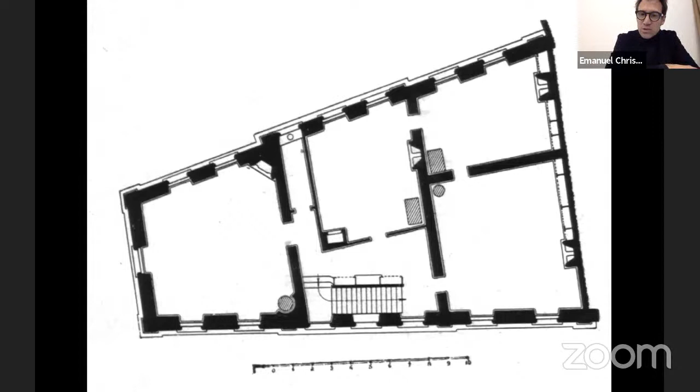That was the slide from the time, and I started to speak about the plan as the essential element, or tool, of the architect. I was speaking — I didn't listen to it again, so maybe it's wrong — about the beauty and the fascination of the plan. It was about the plan representing the essence of a project, of a building, its structure, its space, its tectonics — a fantastic condensation of information in one two-dimensional drawing, all the possible reasons why and how we can imagine and guess that we read in the plan.

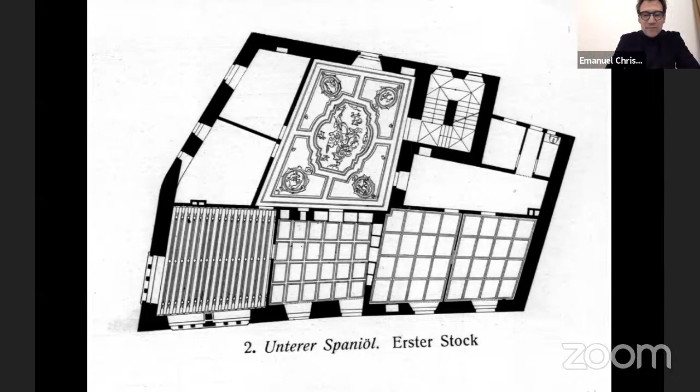There is the relationship of the building represented in the plan and to its neighbor. It's a relationship between a building and the city that we can read or start to understand through the logic of a plan, like in this example.

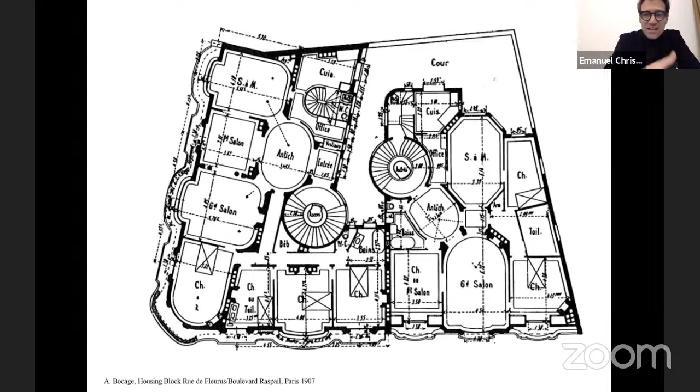So all these plans, I showed them 11 years ago, but since most of the audience is probably a bit fresher than us, I thought why not show the plans again. The plan speaks of how we live in a building. It somehow contains the script of a scenario. A plan is not only about how to build and put architectonical elements together, but it is a plan about how to move through a space and how to use it.

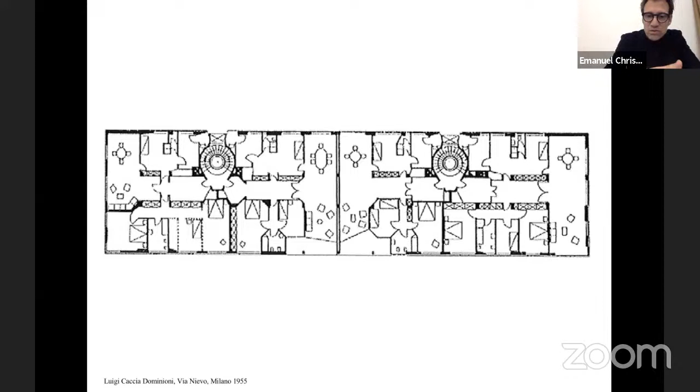There is another very condensed example that actually almost expresses a symbolic value as such. It's a sign. The plan is a sign. It is the ultimate architectonic or architectural representation. However, that was probably more or less what I tried to say as an introduction to a building that was a housing building, trying to vary the system of one type along its development.

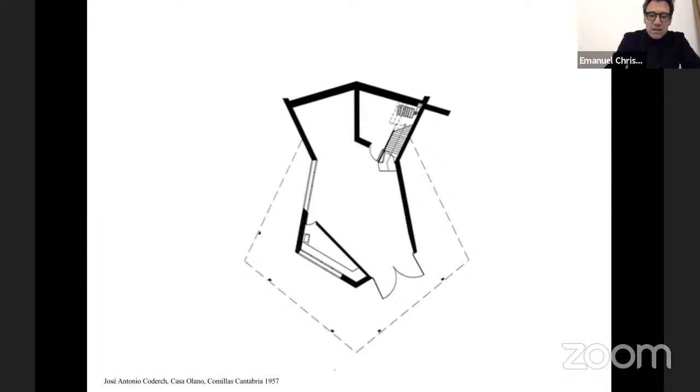But that has been published many times already. However, now it's a different date, a couple of years later. And I thought the title for this lecture could be 'More Plans.' Since I felt obliged to represent an idea of progress, I come with more plans.

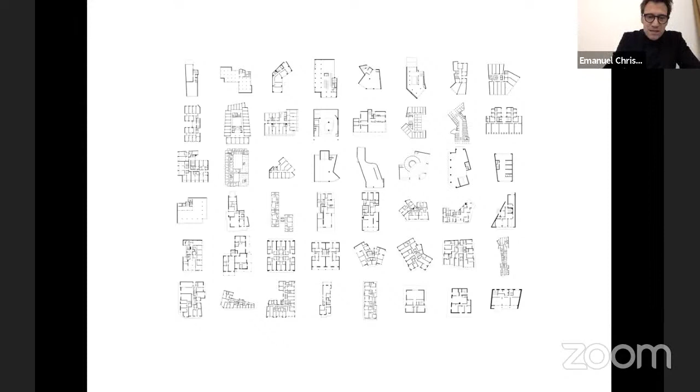Of course, all the architects, us included, traveled for the Parthenon at some point in their life and career. But actually what we found much more interesting is the sea of houses around the Parthenon that was the subject of our research, because we found there is a quality, and I'm even tempted to say a beauty, in this everyday architecture. It was around the moment, not so long after the financial crisis, that we went there, and still we could see and exchange with our generation of architects and students who were starting to get interested again in that structure that they had to use in a different way.

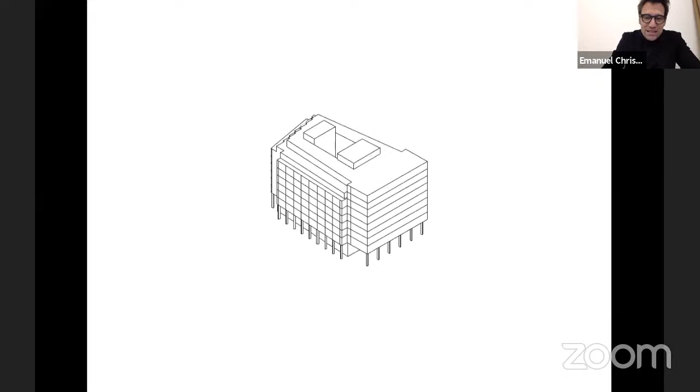Nevertheless, we took these drawings or plans and tried to understand them. So we went to find archival material to measure. I will not speak about every single building, but rather run through a few drawings, where we understand that the plan is only the base for a three-dimensional understanding.

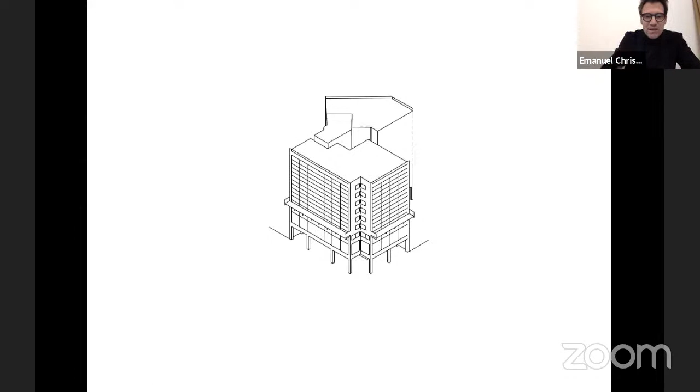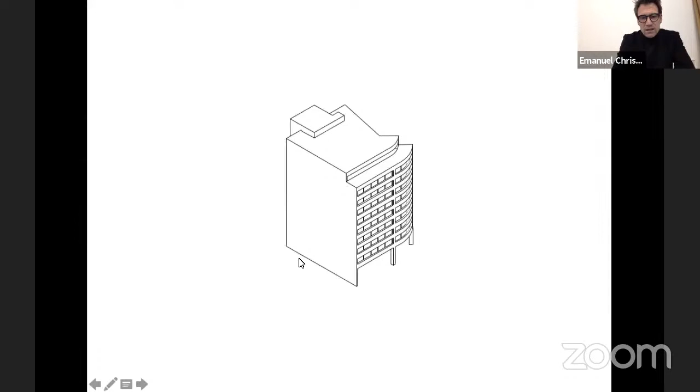So I was speaking about the party wall, the logic of the building, the plan that forms a corner to two sides, the plan of a building that stands completely free and fills a full block, different ways of using the corner, or a lot like this one.

This is a garage. There are many garages. That's the fascinating thing in Athens, that ultimately you have housing, office, garages, because that was to a good extent built in the 60s and the 70s. It's not informal settlement, and still there was not much planning.

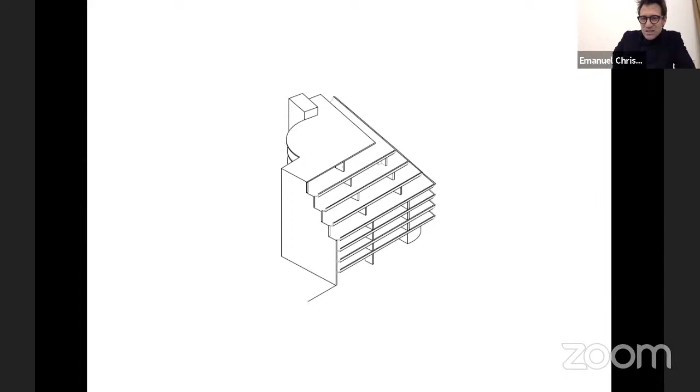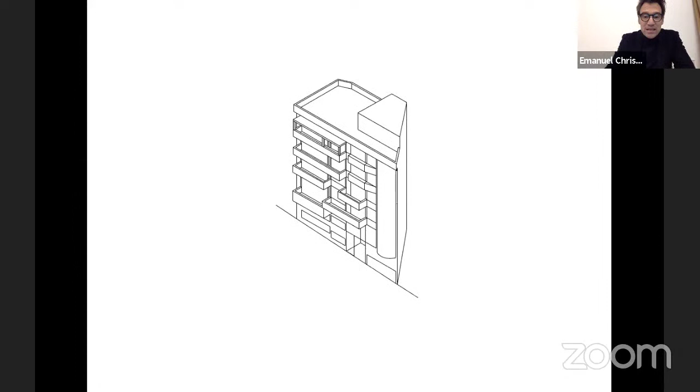The interesting thing is, one could argue, there is the whole variety of urban use in the same type of building. Of course, there are variations - sometimes balconies more articulated, sometimes less. But somehow the DNA, the inherent structure to the building, which is the building structure, is pretty much always the same, and this has to do with means of production, economy, and technology.

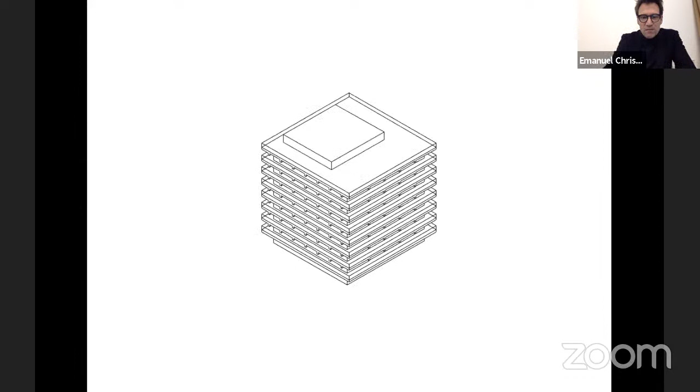You see, so it's more than 40, I guess. I'll go very quick - we can always come back if there's a question about one of these building types. You see, some of them are very regular, freestanding, almost like a temple, a modern temple of the everyday. Some are much more specific.

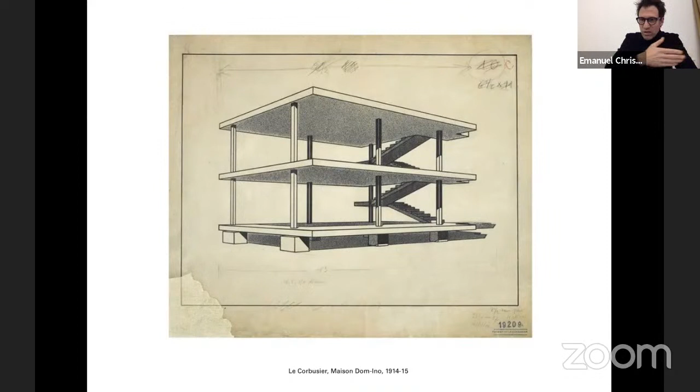And again, the underlying principle in a way goes back to this - I think it was our friend and colleague Pier Aureli who described the urbanism of Athens in a book where he referred also to the Dom-Ino System by Le Corbusier. In a way, that's what's beautiful about Athens - it's a sort of modernist, even later modernist, or Mediterranean modern version of Parisian urbanism, where just one type of house is set one next to the other.

However, we put that together, and I'm sharing this with you just to give an indication of how we started to build up a way of looking at the world of architecture, how we tried to establish a structure in documenting, in reading, documenting, and ultimately using this information, because we believe that making architecture has a lot to do with looking at buildings, studying examples.

It's a very humble and modest and absolutely not new approach, I think, but strangely enough, by studying, by researching and investigating, by finding ways to represent what we observe, we engage with a new design every time we do that. In that sense, I consider - at least that's my position, to be discussed afterwards in the debate - this a very contemporary way of bringing forward our discipline, our profession, and ultimately our environment.

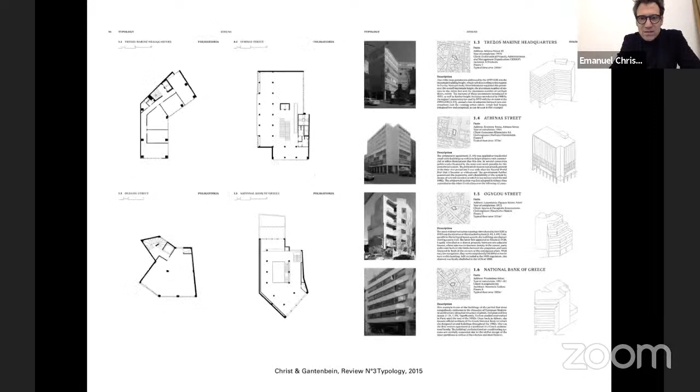So here you see just a few pages spread from that research, the chapter of Athens, then also Sao Paulo, as you could see, was there - that was a mistake. However, look, this is on the left-hand side. You see, for example, bottom left, and we saw it - I mean, this is a strange plan.

Look how beautiful this plan is. I'm speaking about the one bottom left. There is this opening, kind of fan-like plan, the floor plate opening obviously on a soft corner with one column in the center, a little staircase and a lift, and that's it. I mean, this is very pragmatic, very intelligent, very economical, and at the same time so beautiful.

It is so hierarchical - that's why I find it beautiful. It is celebrating the presence of one column in one space. It is celebrating that there is a street front and the back. It's celebrating that there is tension in the geometry of two non-parallel walls. It is celebrating, at least in my reading, the presence of an asymmetric movement through the floor, where you reach the staircase and spiral down or up. And yes, there is a little cupboard, a piece of infrastructure in the other corner where you would have the toilets. I mean, this is sort of the most perfect minimal house I could think of.

I mean, I'm making a bit the case - it is sort of trying to engage with you guys, reading these drawings.

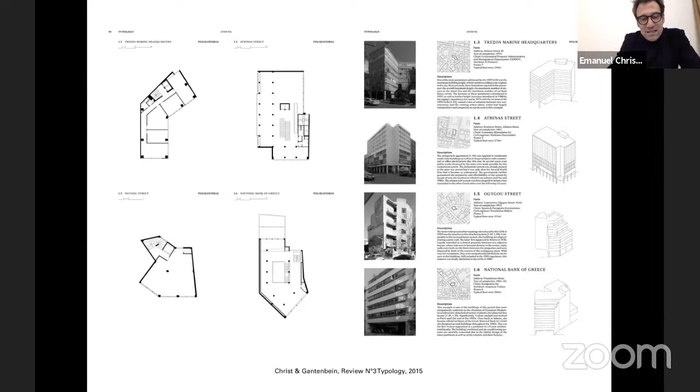So again, here we have these plans that I brought for today's lecture. I could go on forever on many of those. These things have been published. Here, look, that's the garage. Do you see the top right one here? Two car lifts, again, one column.

I mean, that's minimal conceptual art almost. Or the other one down here, there is a ramp. That's a ramp. Do you see my arrow? Yeah, and then you gain the floor.

And it's not, there is so little space, but apparently at some point in history it was worth it. It was, economically speaking, viable to build such a small plot, to offer a few parking lots per floor, and it was an economy.

Maybe after, and that's one of the essential statements of that lecture, after a certain time it might be that the cars are not needed anymore, or maybe there are better systems to deal with them, or they disappear completely, who knows. But the form that is created through that logic at that moment in time is something that will stay, ideally. So I believe the plan, the concept of a spatial configuration, ideally, is something that can last.

And therefore, my celebration, so to speak, of the drawing is in fact an attempt to read more in the logic of the plan than just its functional condition. By doing so, I hope to isolate a quality that I can carry, that we can project into the future.

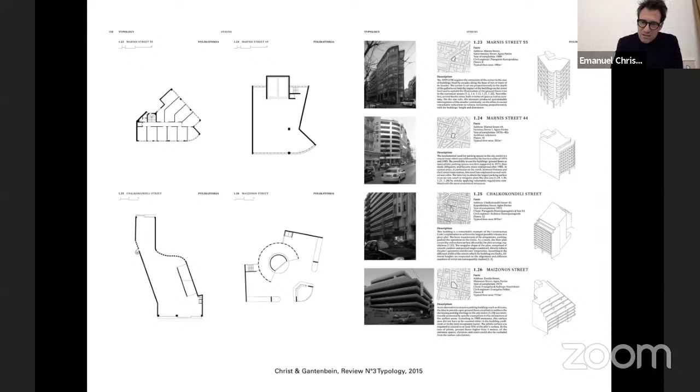And that brings us closer to the concept of type that stands for a principle, for a sort of an engram, for something that is maybe the idea of a building more than the actual building. So studying plans ultimately means deciphering typological patterns, and that's what I think is interesting and also for the teaching, maybe something to be debated later.

Okay, I should regain speed and just browse through these pages of this chapter on the Athens typology, as we called it.

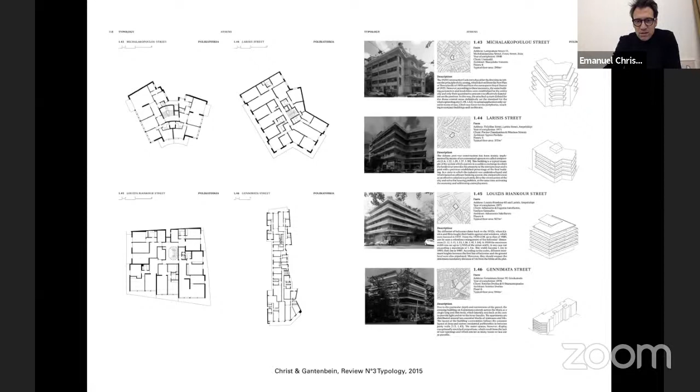As I said, this chapter is one out of four that were published already five to six years ago in this book called Typology: Athens, Paris, Delhi, and Sao Paulo. So it is a survey on these four metropolises. And actually, this was not the first we did.

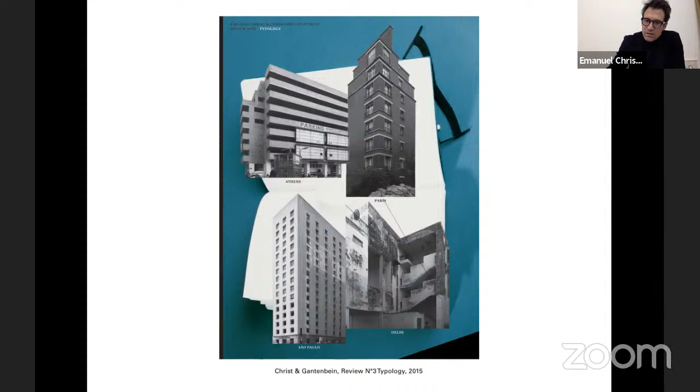So there is even more plans in the first book. That was, as you might guess, here it's written on the side, Typology: Hong Kong, Rome, New York, and Buenos Aires. So in total, we did that on eight or actually almost nine cities.

As I said in the beginning, mainly focused on the urban mass production of global cities, growing global cities, somehow culturally rooted in the European idea of a city, but like Hong Kong or also Buenos Aires, of course under specific circumstances, developing their own, or Sao Paulo, their own independent way of building an urban habitat. And that's very interesting also in comparison.

However, why are we doing that? Why, and we are still collecting plans and making plans, why would we do that? When we published this book, that was maybe two years before, but all that happened since I gave my lecture at the Berlage.

So to me, at least, I think it was a very seminal lecture, and I believe that's the esoteric part of today's presentation. Maybe my lecture on plans in Rotterdam at the time was the sort of an impulse to what then happened. And this is just to give you the title of what we then stated in a very manifesto way: Typology Transfer, Towards an Urban Architecture, we call that.

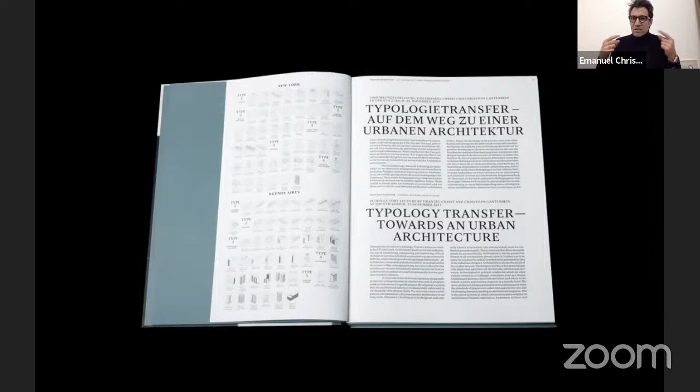Nevertheless, what we then did is we created this collage that was actually an enormous panoramic image, or picture—actually we called it a motion picture because it was a moving picture on a screen. A collage where we took not the plans, but the buildings that we found in these different cities, and we just implanted them into the longest, most normal, perhaps also most boring street in Zurich. The tramway in blue is typical Zurich. The brown house, the beige house on the corner, this is Zurich. It's not bad, it's very good even.

But so what happens? It was more, of course, a provocation towards ourselves. What happens if we start to imagine not only a city or part of a city growing? So it's not only about densification in terms of quantities, it is also about complexification through different types.

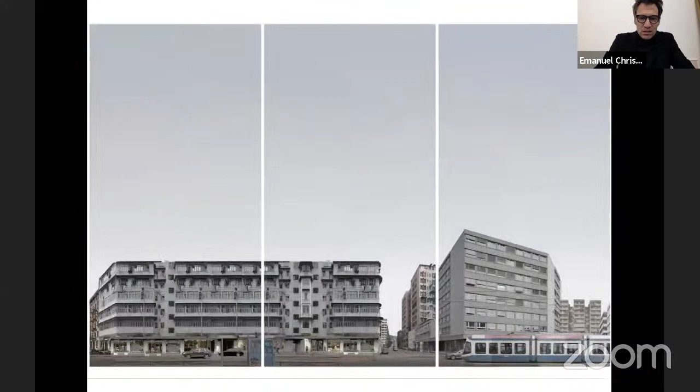However, that was then this image that we liked a lot. And this is, of course, the funny thing, maybe why it came to my mind—it's not that I show that every lecture, so forgive me if I got a bit too nostalgic about our research, but I find it interesting because ultimately we projected this motion, this moving picture, on a 9-meter wide screen.

At the Rotterdam Biennale 2012—already feels like Stone Age—but it was, I think, called How We Make the City, or How to Make a City. And we called our projection Remaking Zurich. So that's what you see here, that we did with our ETH team.

So it is about urban architecture, understanding that the urban artifact, the buildings that we can see, that we can describe, that we can fall in love with, are somehow the key to something lying behind. The urban type is maybe the methodological or theoretical means—a very established convention in architectural theory, but that's why I find it interesting to revisit from time to time. It goes back to 18th century France, but I won't make that detour now, we could do it on another occasion. However, this is something we felt was very inspiring, and that takes us further.

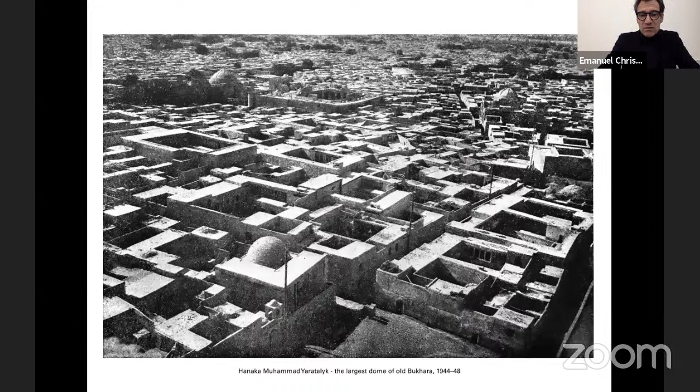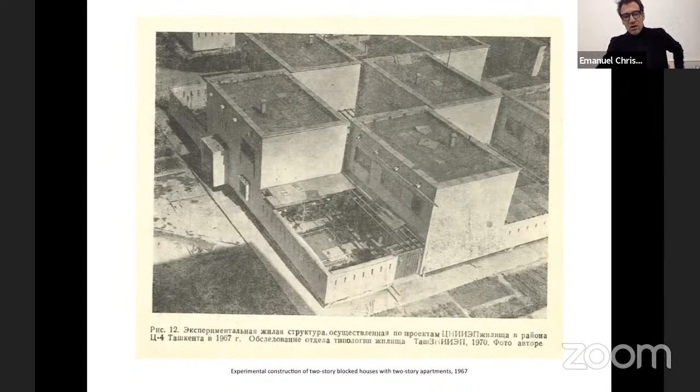There are different versions. There's the tradition of the courtyard house, of course, but also, as I said, we could see this rationally planned version of it. So that's interesting: the traditional example becomes a type, gets reinterpreted, and is pushed forward through modern means of mass production, and so on.

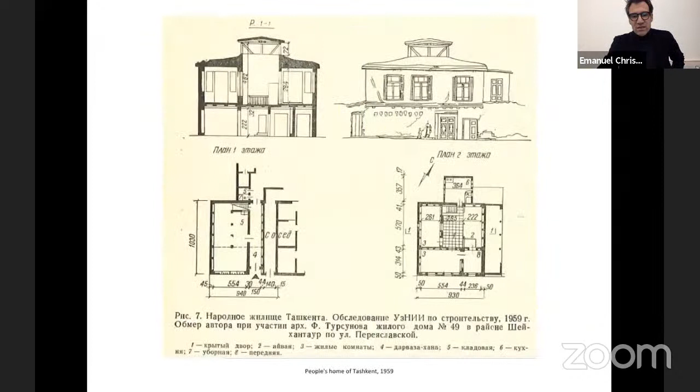There are some drawings that we found. The research was in a way very exciting, but also quite demanding, because we do not speak Uzbek or Russian in our team. So establishing the contacts, but these are things you know.

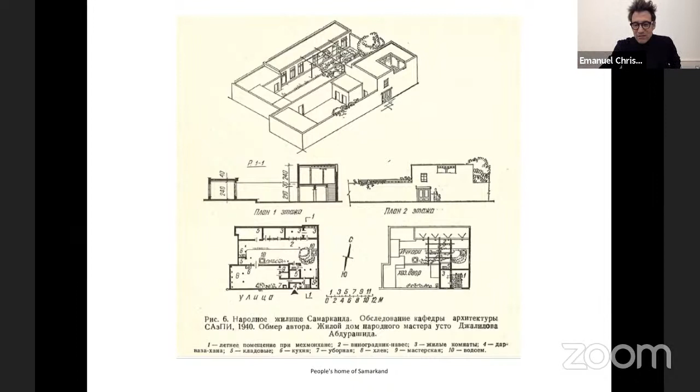Moving forward also means that we communicate and investigate, and that's something I don't have to talk about under the current circumstances - it's even a bit harder.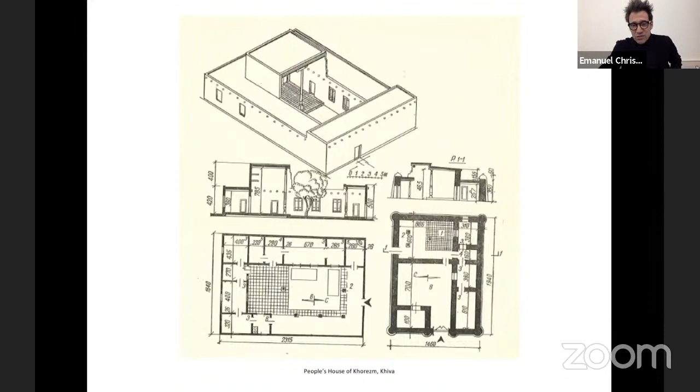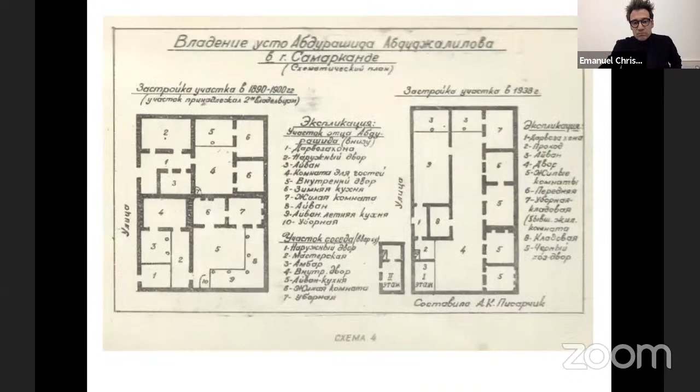Here you see our typological interests, the ways of representation that I was introducing in Athens. In a way they already existed here, because of course under the Soviet times there was a tradition of cultivating and studying these sources. Here you see the map again, speaking of that collision of two systems that I mentioned before.

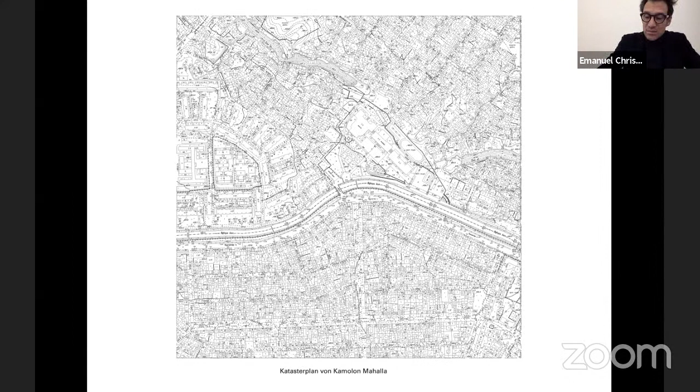Nowadays, and that's where our work is based, we have these official plans that only show the lots. That's what we have. From that, we try to understand and analyze and read that texture, to extract the logic of a building, and finally understand its plans, its types. And that's what we're doing.

With drones we could fly over these stretches of the city. It gives you an impression of this very homogeneous texture, even though if you look more closely we would find many differences. You see the courtyards, you see the overall height. Mostly the roofs are covered with corrugated steel.

There are many of these beautiful drone images, and it's quite a discovery, but there is no contemporary material on it at all. As I said, the quality of life is considered very high.

We could go there and visit. Here you see, I think from above, Stefano Zeni, who is in our team, with a colleague from another chair at ETH. What they are doing is installing their scanner, a 3D scanner that stands in the center of the courtyard and collects an endless number of digital data, so-called point clouds.

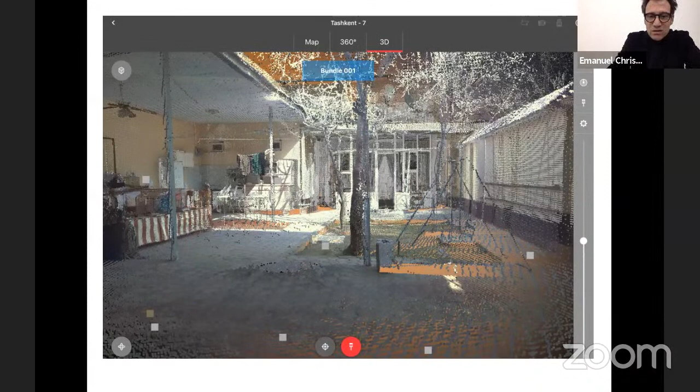As you know, this technology is not rocket science anymore. It's a very practical and beautiful tool to document and photograph, in a way digitally, a 360-degree environment, and that is the sort of roughly filtered outcome of these scans.

The only thing that cannot be registered, as you probably know, is the sky. Therefore the sky is somehow endlessly open. In this digital representation it looks a bit like a post-nuclear event sky, but that's not how it is in reality. That's what we find there.

Without going too much into detail, we can start to think about the relationship not only from one building to the street and to the neighbors, but also the relationship between the living space and the gardens and spaces of production, because there is partly production, but there is also - that's our scanner on the left-hand side, I think, on the tripod.

Here it stands also in the rooms. So we could really go and discover and save this precious information, because most of these buildings haven't been documented, and partly they're also transformed or replaced. We consider that very interesting research. We have all the data, and out of this data - this is now an ongoing process, work in progress.

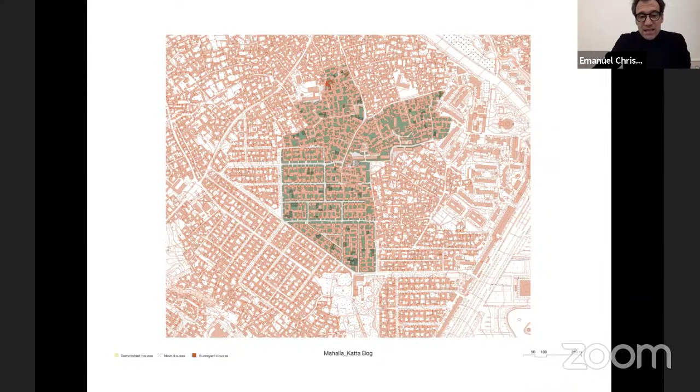We are producing our documents, and here you see I think these are the 10 mahalas that we were looking at in Tashkent. Now you see this starts to become a pattern that we are reading and trying to understand. A bit similar to Athens, there are more organized or less organized ways of putting these houses together, depending on the topography and when it was built.

You see that there is a high percentage of green, so the greenery is a very integrated part in that type. And I find that interesting because we are discussing this more and more. This is the case in Switzerland, I think it's the case in Holland, it's in Europe all over.

Together with that densification that I was celebrating before, there are questions raised about climate, about how to compensate what densification and urbanization is doing to our micro environment. And we are, all of us, architects in general, trying to find ways to integrate green into their designs.

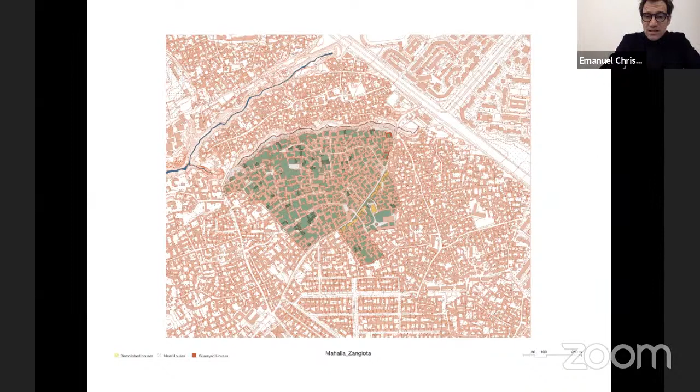That's actually a very old-fashioned way of doing it. It's high density, low rise, and high density is pretty dense, and it has a strong integration of green that is related to an idea of use. It's not decoration, it's not just a pro forma CO2 absorber. As I said, some of it is getting destroyed or replaced.

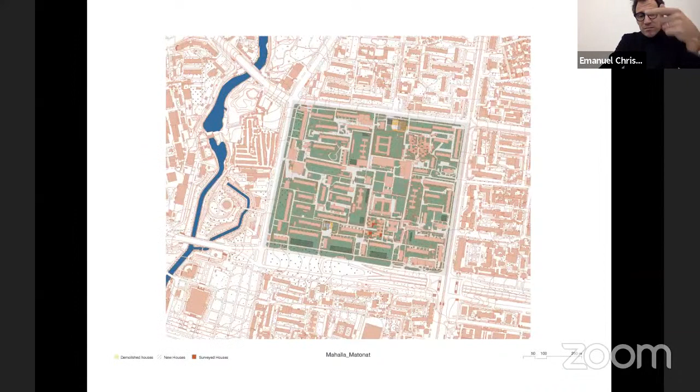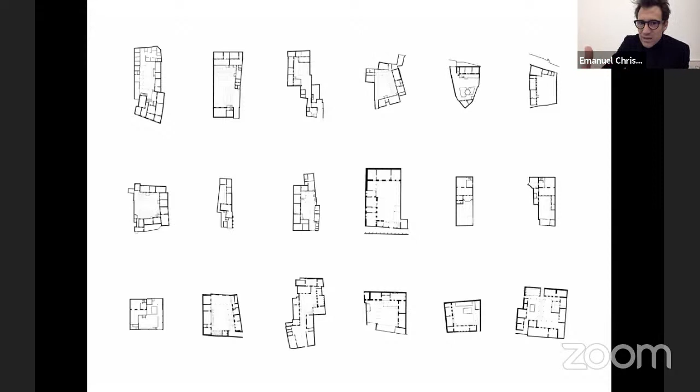That's then a mahala with a different typological pattern and so on. I don't want to lose myself too much in details, but since I promised more plans, here you see another series now of these types that we found in these mahalas. And coming back to my introductory words on what is hidden or kept, condensated and contained in a plan, it is always about this, what you see on the right-hand side.

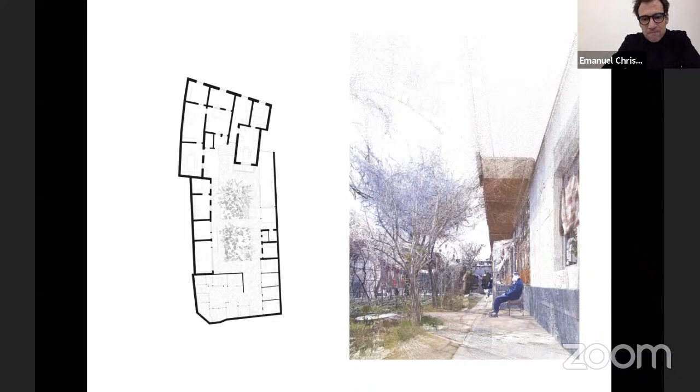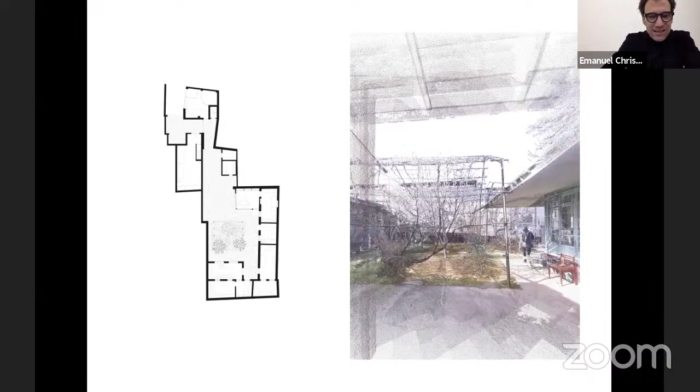And I like this juxtaposition because the plan on the left is the plan, it has a degree of abstraction, and the right-hand side is still a pretty rough image, maybe something between a drawing, a sketch, and of course a very precise digital photograph that gives us an understanding of what this courtyard is, how interior and exterior spaces are related, the small stretch of a garden where you would plant also your trees, bushes, and also fruit and vegetable. Many families have also small animals, typically quails and other birds that make a very strong sound in these micro environments.

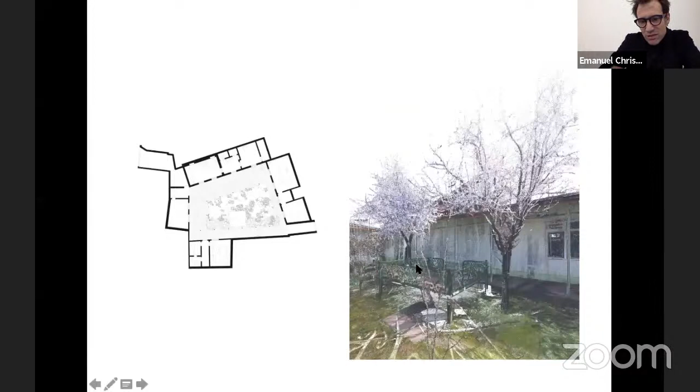This is something like a tapchan, like a bed or a sofa where you would also sit in the shade during the day. It can be very hot in the summer.

So of course, if I was a bit more precise, I would start now to speak about the climatic condition and also the fact that these small plots are then getting subdivided sometimes. And if a daughter or a son gets married, you add another element. So it is, as I said, not an at-once-planned perfect house, it rather grew over time. And in that sense, it is a bit different from other examples that I was mentioning earlier.

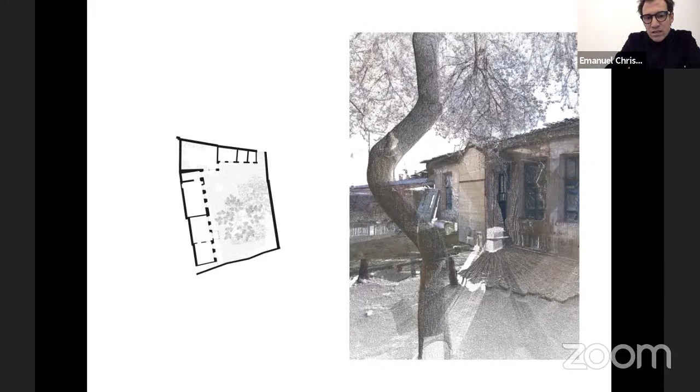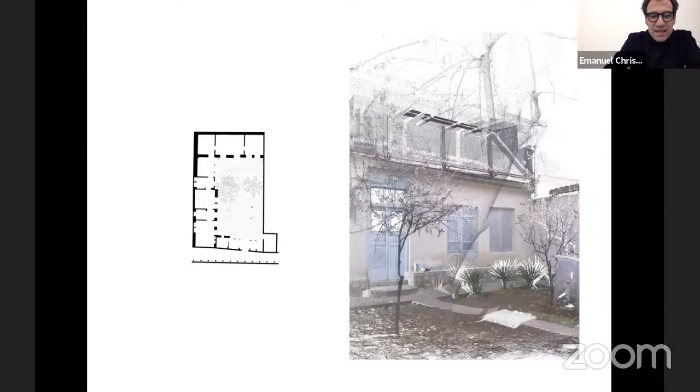And I think this is interesting now for us, that we can learn, absorb and adopt these patterns, these structures, these typological principles as well. In the end, it's mostly the courtyards that we're looking at, but in so many variations, in so many different scales and compositions - the courtyard in the front, the house in the back.

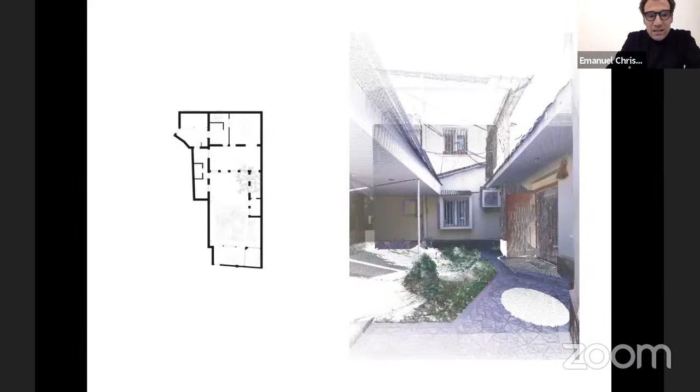As you can already see from the drawing, this is a regular type, so that's a planned one. That's a rational version, whereas the previous one was a grown-over-time version. The stretch, the plot, the lot is very regular, so that's a rational plan, a rational overall design. Whereas others that we saw before were more accidental in their form.

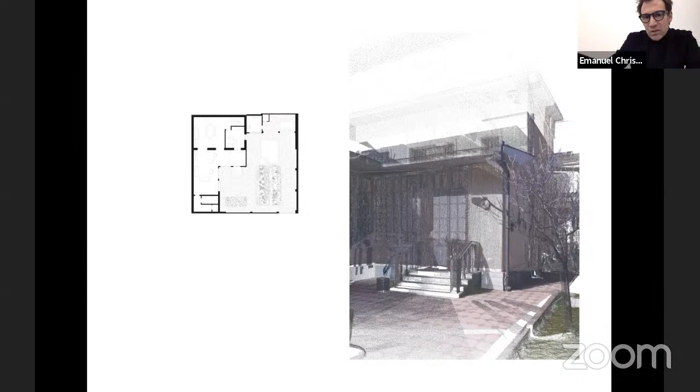So we start only by comparing. We can understand what is the pattern, what belongs to the principle, and what's the individual specific condition. And in very short, that's the logic of describing types: comparing, following a development over time. Only by doing so can we come to that essence of a building. Voila, I think that's more or less what we are.

There's much more information, I'm happy to share. You're the first ones to see that, I think. We shared it with our students at ETH, but not yet publicly.

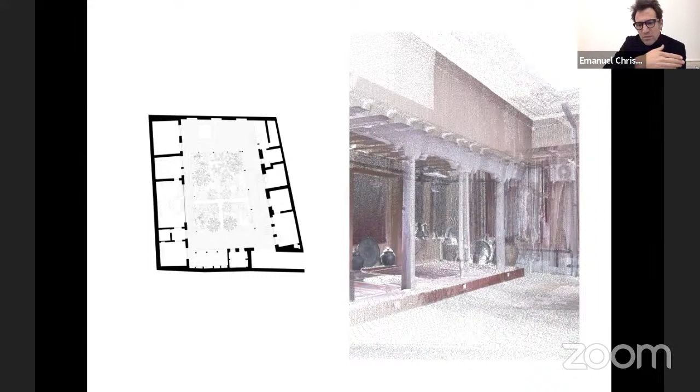We are working on a book currently where we have all these different media in a very beautiful systematic way. And we will also bring that to Venice this spring in May, where in another beautiful building by Sansovino in the Arsenale, just next to the Italian pavilion, we will do a representation. There our research project will be presented.

It will be debated and discussed, and showcased with an installation we are preparing. It is a scientific, artistic portrait that we are doing together with Bas Princen and with a photographer from the Netherlands, whom you for sure know.

And with whom we collaborate, which is a fantastic thing, and also Carlos Casas, a filmmaker and artist living in Paris, recording sound. So there is a very interesting multi-layered portrait of that phenomenon of the Mahalla that we would like to present if ever we can go to Venice.

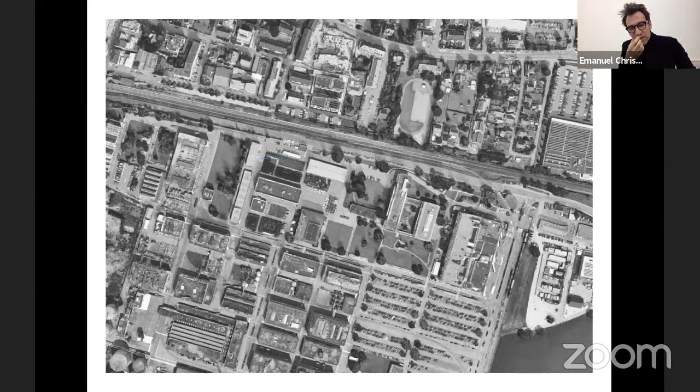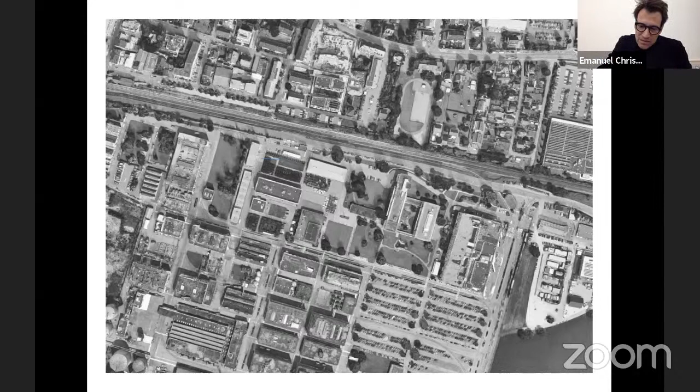Now it's the headquarters for the whole German part of that company. We were invited to make a competition project, more or less at the time when I was at the Berlage last time, so it goes back to around 2009, let's say. There we found this campus based on the idea of a classic modernist urban pattern. I'm tempted to call it the open field or even the open plan.

So it is not Athens, it's not Paris, neither is it the Mahalla in Uzbekistan. It's the more generic, European-American modern pattern of building a campus on an open field. You see a model, you see typical buildings as they were designed according to that idea throughout the 1940s, 50s, up to the 80s.

And then many things changed. The production plant got partly reduced, and the focus and emphasis shifted to administration, the headquarters, research and development, and communication, as it is for many industrial plants and sites in European cities.

This is a model that we built. It looks a bit older, and it looks a bit—I wouldn't say it's a shitty model, it's actually quite nice, but it's not very precise. You see, this is our representation, a model that is a few years old, and you see basically boxes.

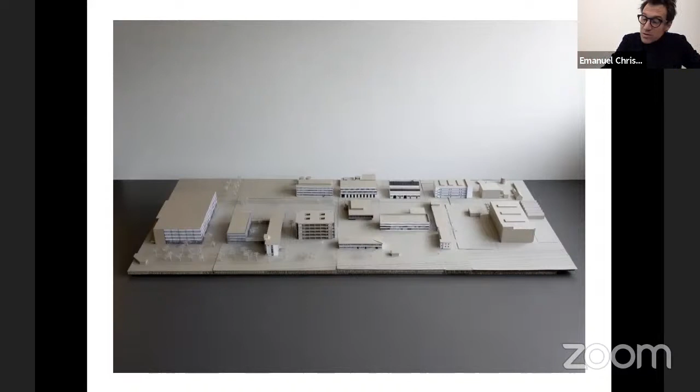The idea was to reframe this open plan of the campus, to create different interstitial spaces, a sort of plaza, and to relate with a minimal vocabulary our buildings to this urban condition of a public yet monofunctional environment, which is this campus. And that's a very interesting problem. That's why I chose this project for the discussion.

So it's not necessarily a fancy museum. It is more the everyday, it's the normal. And I thought it goes maybe well with the settlements in a Central Asian city like Tashkent, even though there is no courtyard, but there's maybe some other kind of ordinary things.

It goes certainly well with Athens and the Dom-ino System. So somehow to try to find the specific quality in the modern project, its types and its plans. That's maybe the topic of that second part, that's why I called it open plans. Since I guess we all know, in a nutshell, modernism is about the plan libre. And this idea of freedom and liberty then also comes with free movement by cars and all the disastrous things that followed. But I would make the case that the free plan, in this case the box, is still a very, very beautiful ambition in architecture.

That's then the building we finished, I think, in 2011 or so. So it's almost 10 years, perhaps. Yeah, nearly 10 years. It's our monumental reaction to the most banal principle of modernism, the column and the slab. And as you can see, here now maybe it gets physical again, because ultimately it's not about the plan, it's about the building, if I may say. I am a scholar of plans, perhaps, but I'm also a builder. We believe in buildings, and we are very privileged and happy and proud that we can contribute buildings to our environment.

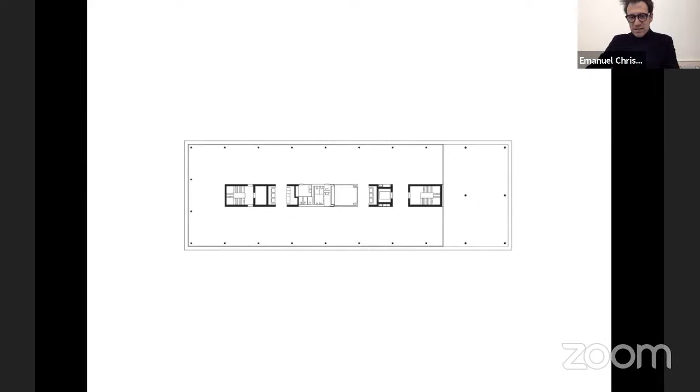There is one thing though, and you see it on the right-hand side, there the rhythm of the column changes. We see the line where the facade stops and the naked slab continues. So this is not a big thing, and it's not the courtyard of Tashkent, but it is the version of an additional space in an open plan that we convinced the client to build, even though the client thought he might not need it. This is an open loggia, a little bit, and it's almost like a mathematical scheme. I don't know, you could measure it, 20% maybe of the floor plate that we would give to an external space that is an informal space within the formality of the design, a space that belongs partly to the public square, that intersects with an axis that is in the grid of the main axis, the sort of the cardo of the industrial layout of that site.

So this little loggia, this is the ambition, that's the promise, it can take on a multi-layered, more complex function, because it belongs to the city, if I speak it or describe it as such, as it belongs to the building and to the users inside. And indeed, at least now it's very, very cold, but for many, many moments throughout the year, it's used, and actually very intensively used by the people. That was, of course, as architects sometimes do, the photographs when the open plan is also an empty plan.

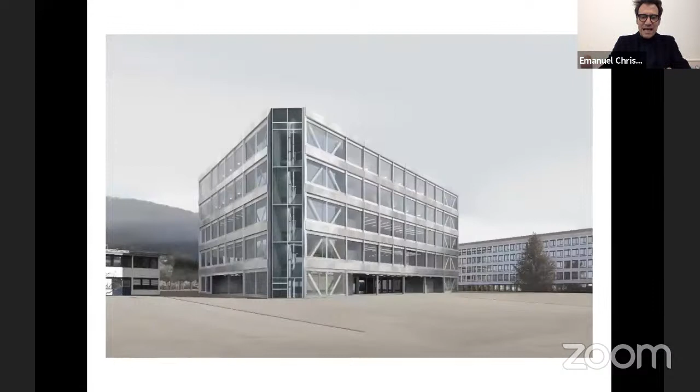The idea is to imagine this building as an industrial functional building. If you look at the proportions, you would start to see, this is a rendering, but still compared to the neighboring building it is quite generous in dimensions and proportions. So I'm tempted to say the design metaphors that we sometimes use are still in vigor. I'm speaking of a sort of an industrial palazzo, something that has a dignity and even a representation, an idea of representation with its facades.

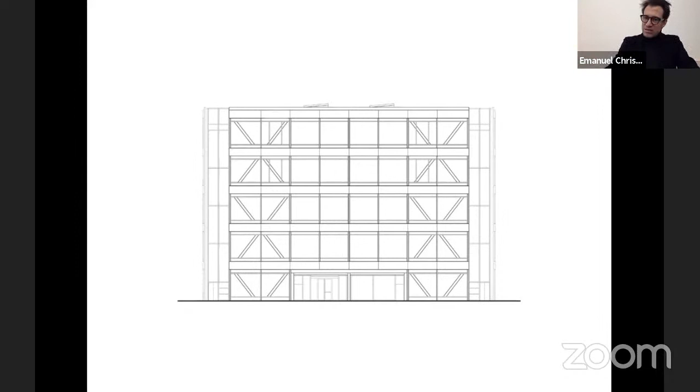In a more abstract representation, we would see it in an elevation drawing, a ground floor with 4 floors above, the short facade on the side to that plaza, facing the first building we were just looking at. So the horizontal bands, almost a bit of a signature element of modernism, as we could see in Athens, are coming back in that building again.

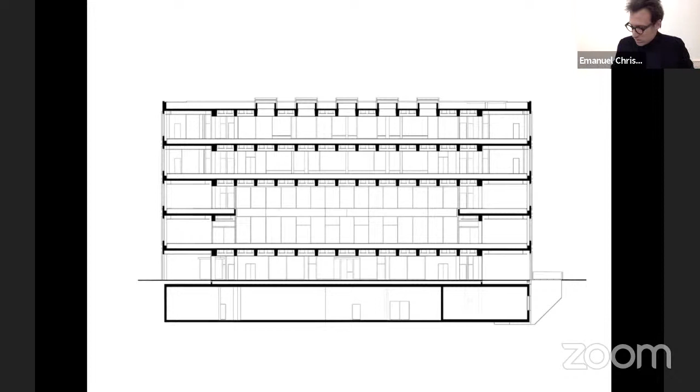And that's also why I thought it's maybe interesting to speak about that today, when we are all sitting in our home, or most of us in our home office. What is an office building today? The design goes back before Corona, and already the brief was to imagine a building that is, in the first place, a building where we can meet. So it was called the meeting room building, or the convention or conference hall building. But the longer we were discussing, the less clear it was what exactly is the ideal office building nowadays, before the pandemic.

How much do we have to integrate teams? How much do you want to work together? Does it need cells, retreat spaces? Yes it does, but how many? Do we need big auditoria? How stable, how static is a working environment? How dynamic should it be? How social can it possibly be?

And then, throughout the discussions and the experience we all made with the pandemic, we understand that probably a good part of working activities, I don't know whether they should, but they could at least be removed from campus, sadly also in universities, but that's a different discourse we might speak about a bit later. And it can be displaced, it can be transferred to home. But some other activities, meeting, exchanging, socializing, getting annoyed, getting inspired, being attacked, being forgotten, I don't know, this happens only when you are somewhere where there is a social, inspiring environment.

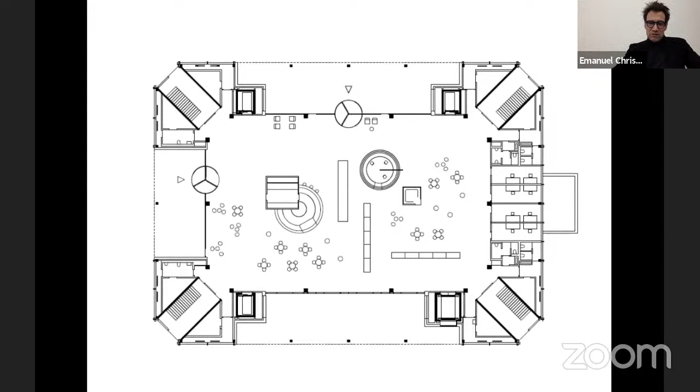If we give a bit more information, you'd see there are lifts also on the 4 sides, but literally it's a house working on the 4 closed corners, and the rest should be as open as possible. Still, you can see there can be more or less conventional furniture, but basically—and this is again not something we invented, but that's the funny, sad, and great thing about architecture.

We could describe that as an open space layout from the 1970s. We could say it's a loft. Basically the ideal type is probably just the warehouse or the parking lot I was showing you in Athens. That's the ultimate sustainable building, because there are wide spans, a solid structure, and it can stand for a long time. This is super simple—a sort of banal bottom line statement, but I'm pretty close to this conclusion: good buildings are durable in many ways when they allow for that generosity and unspecificity of structure.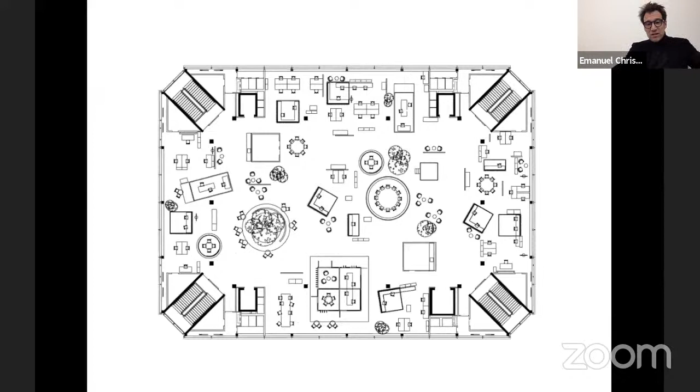But then what gets very specific is the whole development of these interiors. That's something we developed together with our wonderful team in Basel at the office of Christ Gantenbein, but also with friends of ours who are furniture makers and interior designers—Inch Furniture, great people.

We started to test things, and now, rather than end with building—building models is a very important part of our work—we tested here the big open floor that then all of a sudden is not so big anymore. The plants are coming back that we saw in the Mahalla. We saw the curtains, intimate spaces, experiments on how dense we could go. And all of a sudden the urbanism we saw earlier is maybe also potentially present under the grid of this waffle structure, this very beautiful structure load-bearing in 2 directions.

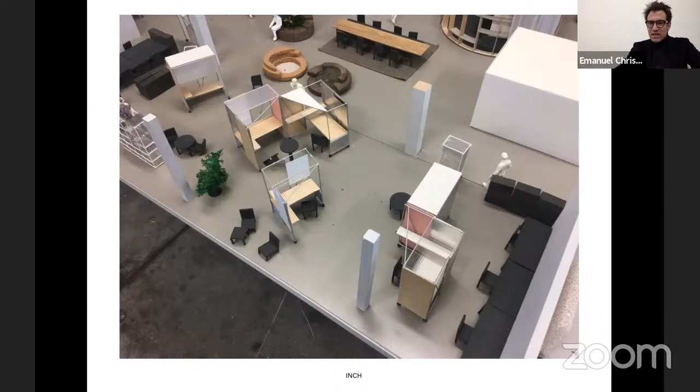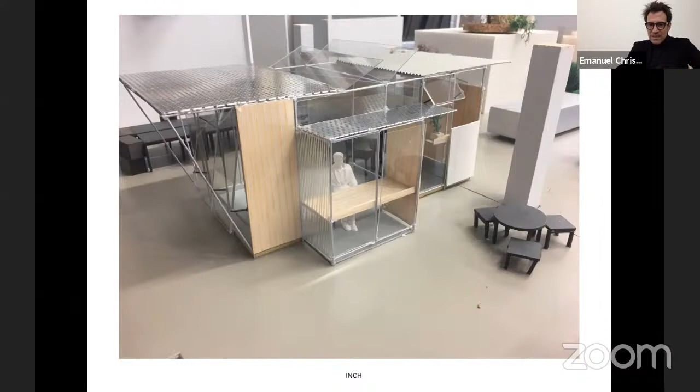The furniture itself is maybe part of architecture—it's like informal architecture inside our urban layout, the rigorous generous frame for that development. Here you see our partners developing the furniture, these elements. I don't know, is it a case study house within our building? Is it just a piece of furniture? It goes further—this is a prototype.

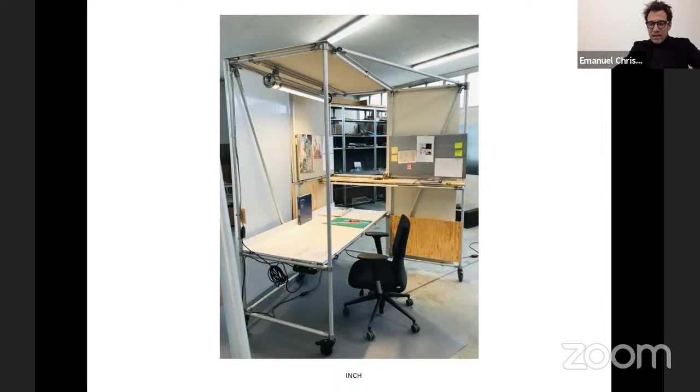So we started to look at these things at scale 1:1, movable office desks—a speculation about the informality of the working environment. I feel this is pretty to the point when we look at how we have to adopt and adapt to new circumstances every day. Of course that model is quite big, and that's the workshop—sort of the ideal office is actually the workshop, we could say.

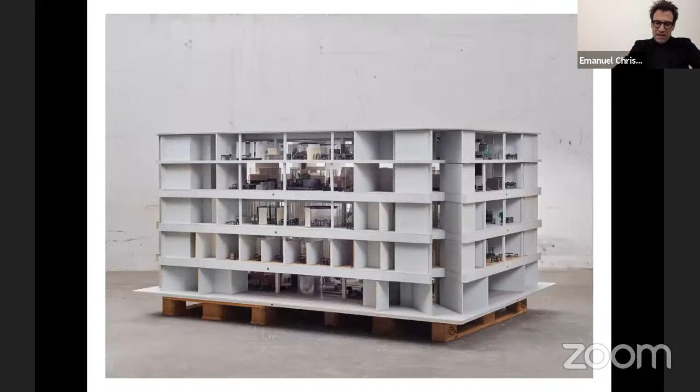Here, when we just pile it up as a stack, that's also actually how the structure works. It's a working tool—you know what models are. I can just encourage that we still stick to physical models, because in the end they come closest to what it means when you build it.

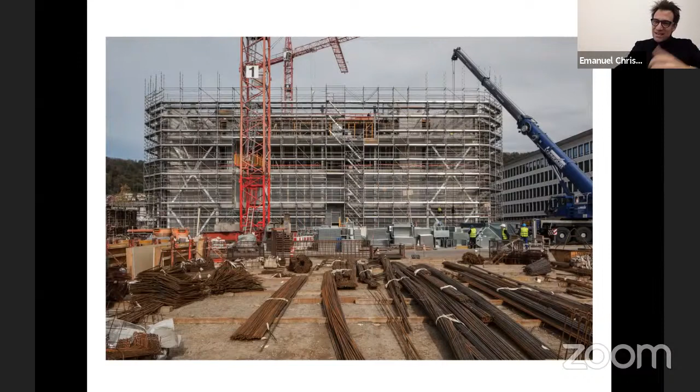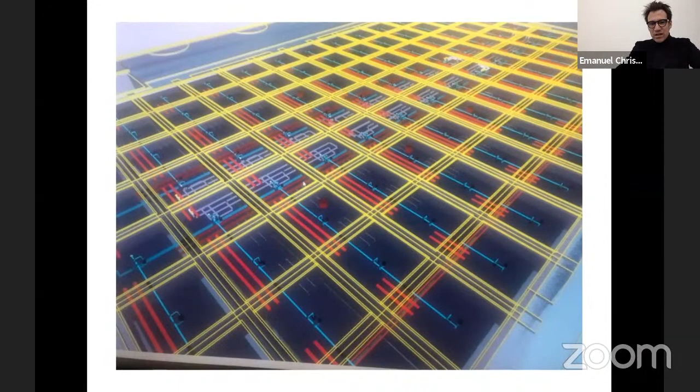Actually, the structure is up, still under construction. So, Solomon, we go back again to the tradition of that lecture—sorry. Here you see how this wonderful structure is produced. Of course there are digital models too, because of the integration of all the technical layers, mechanical, etc. And that's how it stands, approaching the end. The open plan is there, of course, to be filled in with all these things.

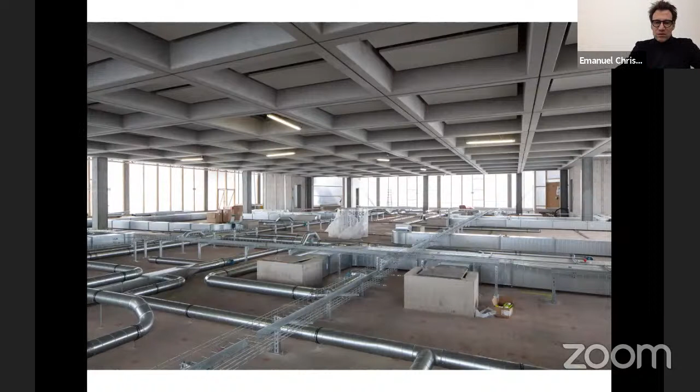That is also part of architecture that I like a lot, and here you see the distribution of the pipes and all that. But the essence is the plan. That's now the true last version that you got to know. This is the last plan I show in this lecture, and I think I close with that. The promise for more open plans is there.